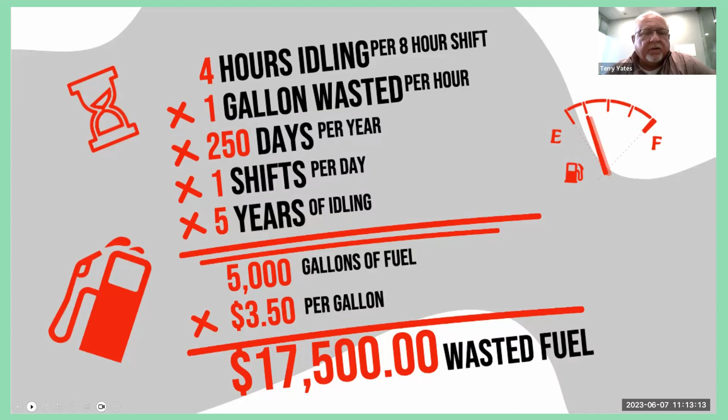So now let's look at the wear and tear on the engine. Now, this is the Ford number. Ford says when you're idling the engine, that is 33 miles of wear and tear on that motor that you're not seeing on that odometer.

So I've run into instances in the last few years where guys are doing their PMs by the odometer. They're not considering the engine wear and tear, but actually the PM is mainly engine filters and so forth like that. So you need to consider the hours of idling on that engine as far as miles and judge your PMs like that.

I have had customers too that have gone in for warranty at Ford, and Ford will plug into the black box and they'll say, well, your engine is out of hours on the warranty, because they're looking at hours, not the odometer on the engine.

So there's some tidbits to keep in mind, but that's a lot of wear and tear, which causes breakage. And we all know if we've been around vehicles at any part in our life, it is harder for a gas or a diesel engine to idle than it is to go down the road. Because when it's in idle, it builds up heat. It's not got the air flowing through, so it's not as easy for it.

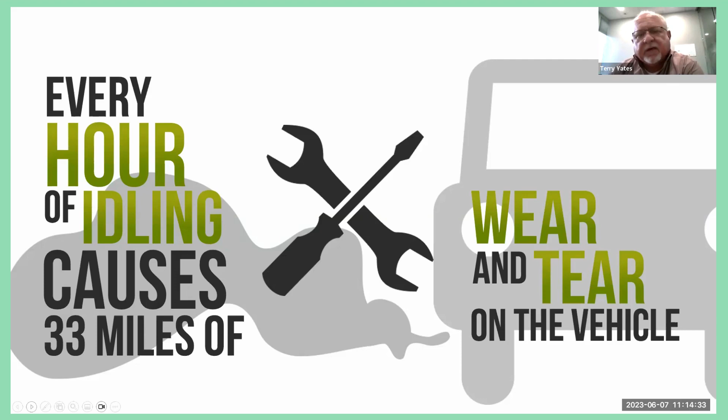It causes breakage. So same truck, 4 hours a day, 33 miles wear and tear. Now we see that same truck gets 165,000 miles of wear and tear on that engine that you're not seeing on that odometer in a 5-year period.

That's a lot of miles. I went and talked to a municipality out in Arizona one day, and that fleet manager didn't acknowledge this. About 15 minutes later, he came back and said, so you're telling me that truck out there that's got 200,000 miles on it, actually that engine's got 365,000. I said, based on an average of 4 hours idling a day? Yes, sir. That's a lot of miles on that motor.

I've run into a company not too long ago that's changing engines very often because they're wearing their motors out from idling. That company idles 6 to 8 hours a day, quite a bit of idle. So they're wearing engines out.

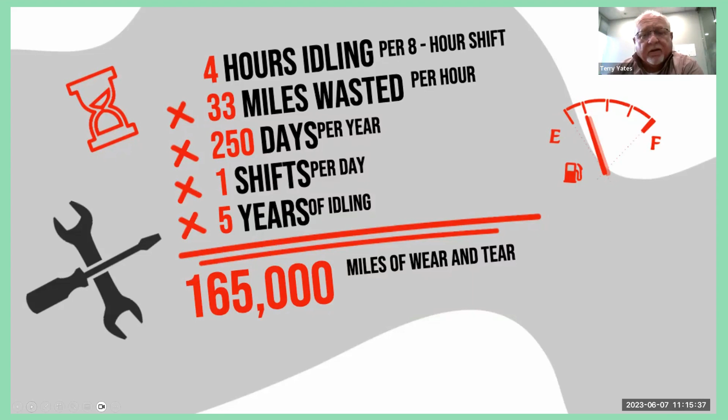But keep in mind, let's look at the green initiative, let's look at protecting the environment. That same vehicle, a gallon of fuel, 1 hour of idle equals 22.06 pounds of CO2 for diesel being put in the air. If it's gas, it's 18.95. So this same truck over a 5-year period, same fuel, we get 55 tons of CO2 emitted in the air. Now, I'm not trying to convince anybody of global warming, that has nothing to do with it. I'm talking about the air that we breathe, and we do need clean air to breathe.

55 tons of CO2 in a 5-year period. Let's think about that. What if you had 100 trucks in your fleet? How much you're messing up the air, and how much cleaner it would be if you cleaned up that idle. Just some thoughts to think about.

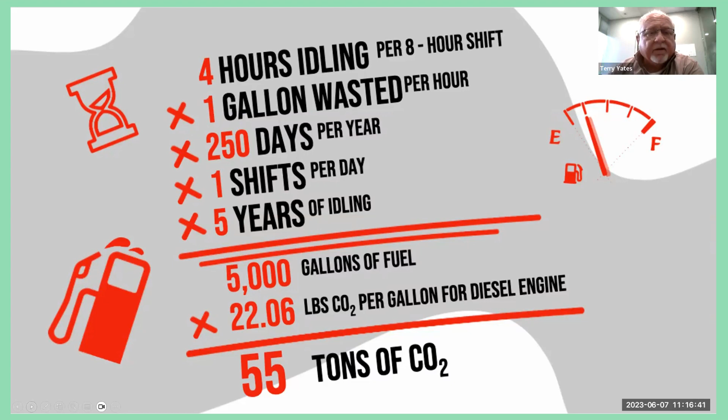So let's look at a summary of that. 1 truck, 4 hours of idling, 8-hour shift, 250 days a year, 5 years of idling. That's 165,000 miles of wear and tear, $17,500 worth of wasted fuel, and 55 tons of CO2 put in the air for 1 truck. And that's just for the 4 hours it's idling. We're not talking about the other 4 hours when it's driving or anything of the sort, just the idle.

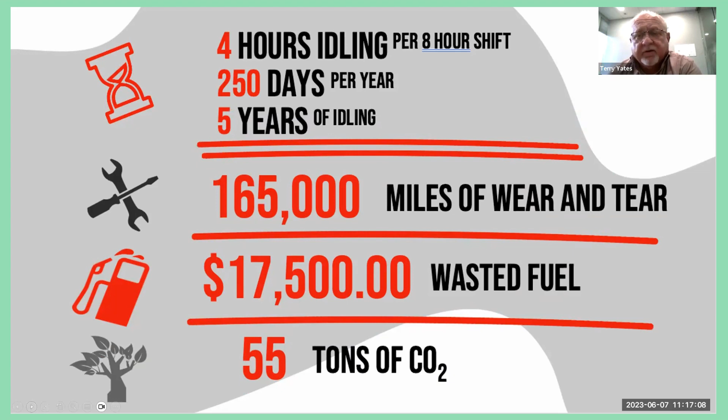We do have a solution. That sounds kind of corny. I've told them I'd like to change that because every time I say it, I feel like it's a little corny to say that. I think we got a solution, but it is what it is. That's what we're talking about.

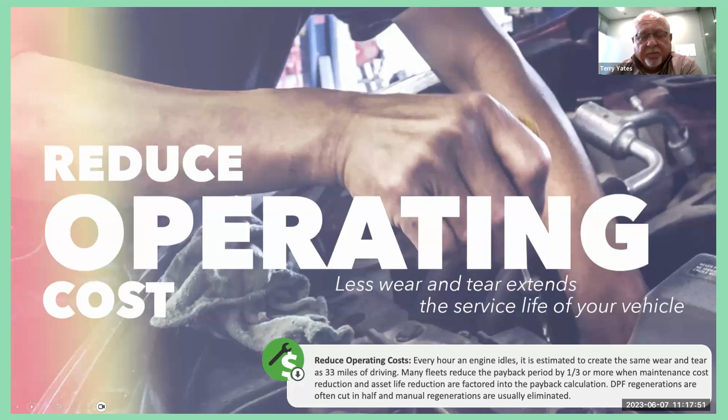We do have a solution, because if we can help you stop the idle or mitigate that idle, it's going to have an impact on the environment, on your gas bill, and on the wear and tear on your engines. It's going to help you several different ways. It's going to reduce fuel consumption if we can mitigate the idle. It will reduce operating costs because there'll be less breakage on the motor, and it'll reduce emissions, so we're going to breathe easier because we're not going to be putting CO2 in the air.

Now let's talk about why we idle. Most of the time, the reason we idle is for creature comforts. As I mentioned earlier in my presentation, in Florida you've got humidity, you've got heat. So why do you idle? It's because you want that AC running, because you're hot. And when you're in your office making a phone call, working your laptop, or taking a break, you don't want to sweat, you want to cool off.

Improved operator safety and comfort, that's what we can do, because our system can turn the engine off and you still get factory heat, factory air from the dash with the factory controls, and nothing changes for that operator. The only thing that's changing is we're turning the engine off.

And you're saying, wow, how can you do that? I said the same thing. When I first thought about this, I had ZeroRPM, I said, you can't do that, that engine's got to be running to provide AC. Let's talk about that a little bit. So when the operator pulls up and puts his vehicle in park, we give him a 5-second countdown, and then we automatically turn the engine off.

Our computer does this. He does not flip a switch and do this. We will run his heat, his AC, his power, and you all see that screen. We're going to run everything that he has to do with his job all day long without running the engine.

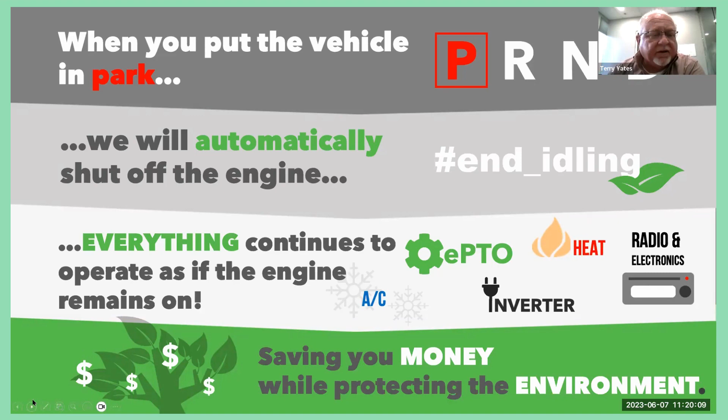We take a charge from the factory alternator, so when our battery gets low enough, it will start the engine to take a charge from the engine. But there's more to it than that. Let's kind of get into the nuts and bolts of this thing.

How does it work? When the engine's on, you've got a belt-driven alternator that provides the power. You've got a belt-driven coolant pump that circulates the coolant in the engine block that provides the heat when you need heat. And then you have a belt-driven AC compressor that turns as the engine's turning, that provides the cooling for the AC.

So when the engine is off, you're running on our lithium iron battery, which is the safest form of lithium made - a very, very safe form. You have a DC electric coolant pump, and what that means is it's mounted underneath the hood, and it circulates the coolant in the engine when the engine's off, if you've got it on heat.

You guys probably don't deal with that much in Florida, but if you're in the northern countries and you want heat, that's an important factor, because you want the engine warm enough to provide heat through the factory dash. So here's what happens when that engine cools off enough that it can't provide heat: we're monitoring that, and we'll start the engine, warm it back up to operating temperature, and then turn it back off. So we're getting rid of the unnecessary idle.

So now let's talk about the important part to Florida: the DC electric AC compressor. We have a patented one-way valve that we tie into the Freon lines right outside the factory compressor. So when that engine turns off, that valve opens, and our DC electric AC compressor starts running the whole factory system, the same way the factory compressor does, except it's not running - it's our compressor that's running. Same Freon, same everything, same complete system.

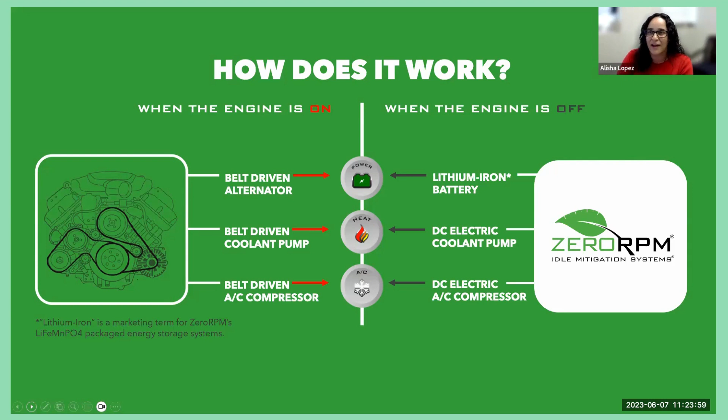Very important question. What I thought you were asking at first was, once our system is engaged, it will cycle 24/7 till you turn it off. But if you were saying they were going to work on the truck, anytime the hood is open on the truck, it disengages us. We will not start that engine at all. Important safety factor, because a lot of people are concerned about that. That's what I thought you meant, but let's answer your real question now.

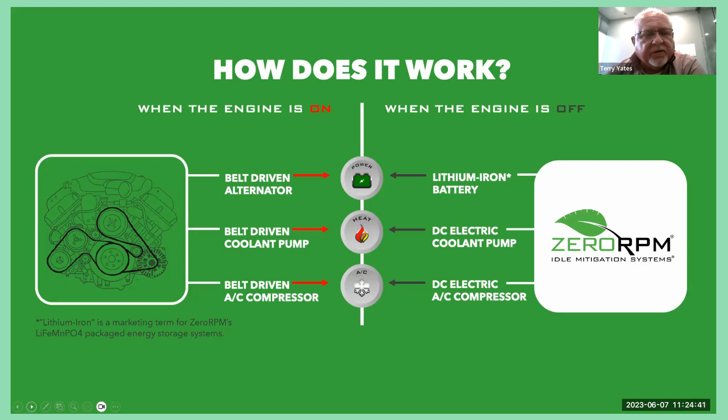So let's talk about the features, and we'll get to answering your question. We have engine-off AC through the factory vents, engine-off heat through the factory vents, lithium battery power to everything, and automatic recharging - meaning we can charge from the 12-volt alternator or a solar panel. We have solar panels that perfectly fit the roof of an F-series truck, and we have them for transits and everything else, so you can use a solar panel to help charge that lithium, which is also a big green initiative. You can also use shore power, so there are several ways to recharge that lithium battery.

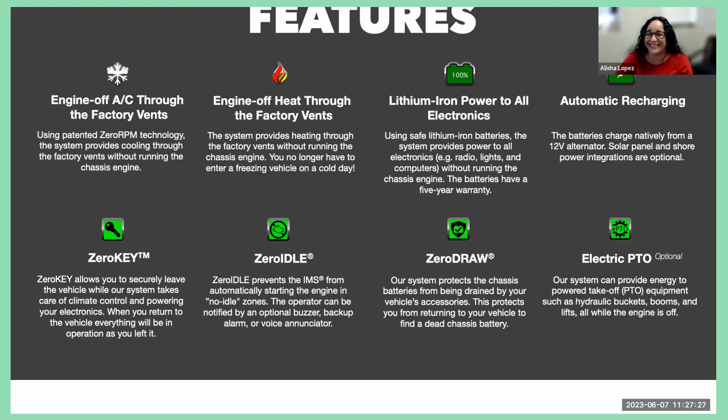So yes, when you get out of the truck and leave - I did an inspector's truck out in California, and that was exactly what he did. He was idling his truck, so he would leave the key in it, leave it idling, and go do his inspections. A couple of problems with that: somebody might want to borrow your truck, and another thing is it's just sitting there idling, burning fuel.

So you push that button, zero key, and we turn the engine off. He can lock his truck, walk away so nobody steals it, and everything stays the same. He can come back 3 hours later, 6 hours later, 8 hours - I've done that overnight. I always tell people this, and it's a fact: I was in Southern California, and I had it in zero key, and I didn't even think about turning it off. The hotel wakes me up in the middle of the night, and they ask, 'Mr. Yates, do you have a gray Ford F-250 out there in the parking lot?'

Yes, I do. And they said, well, you left it running. I said, don't worry about it, it'll turn itself off in a minute. Just leave it alone. It won't turn off until you turn the key.

So there's another button called zero idle. In our country, it's not as enforced now as it will be, but there are zones where you cannot idle an engine, like hospitals or government offices. When you're parked up close, they don't want you idling.

So if you're on zero idle, you can hit this button and our system will not start to recharge itself. Instead it will send you an email saying, hey, you need to move me so I can recharge, or I'm shutting down. But you got a choice, I'm not starting the engine. So it keeps you from getting a ticket in a zero idle zone.

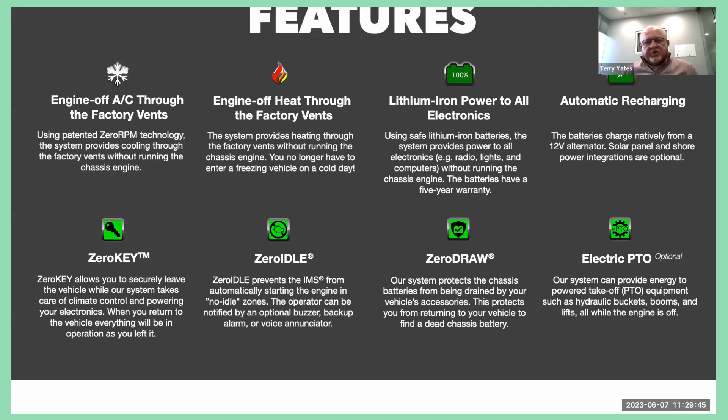Now what we do is actually monitor. So when we start the engine to recharge our lithium battery, the first thing we're going to do is check the crank battery. If the crank battery needs some charge, we let the alternator charge it first. Then as soon as the crank battery is fully charged, we take all the charge the alternator is putting out straight back to the lithium battery.

So all of this is done automatically. Your operator does not have to even know that this is happening. It's just going to happen.

We can run an electric PTO. I cannot do a bucket truck or digger derrick. We have a previous non-compete contract where we designed those systems for Altec. So Altec uses our system on their bucket trucks. It's called a JEMS unit.

You may have some of those in your fleet. The JEMS unit is our unit, an earlier model. We have evolved quite a bit since then, because we do a whole lot more different applications than bucket trucks or digger derricks. We can put ZeroRPM on any application that's out there.

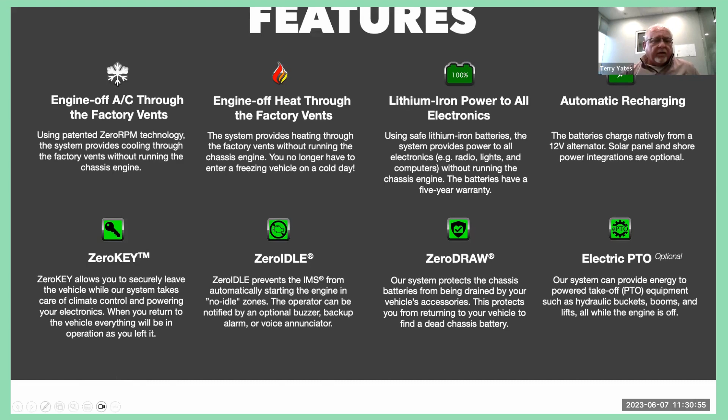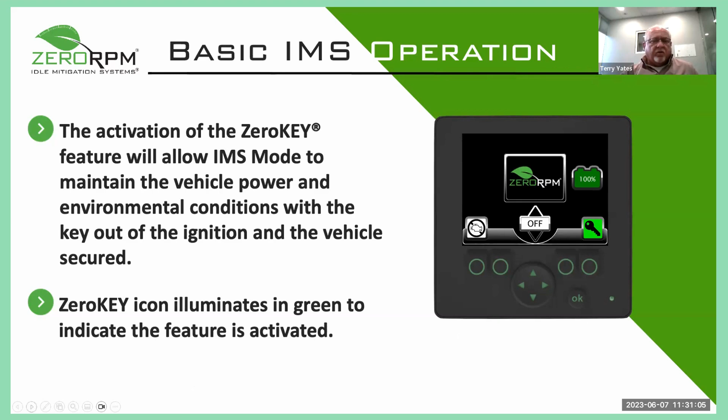When you activate the key, you can see it turns green. That means zero key is on, meaning you can take the key out, lock the truck up, and walk away. Our system is fully integrated.

Here's one difference between us and some of our competitors: everything we have is designed, engineered, and built in Cullman, Alabama. Now, yes, we do buy certain parts from different places, but it all comes in there and is all designed, engineered, and put together there and integrated to make sure it works together.

I have a question for you, Terry. So for instance, with Buy America, I don't know if a lot of people on the call know, but this would be perfect for those kinds of vehicles. Because I know with certain funding through DERA, through the Environmental Protection Agency, there are certain parts and qualifications that fleets need. And they're having a really big push on everything being purchased pretty much in America.

Yes, so that's why I wanted to make sure all the parts, everything, is from Alabama. Well, yes and no. I'm sure certain portions are. It's like on a lithium battery cell, I don't care who the manufacturer is, they all come across the water right now. Yes, they do, you're absolutely right.

That may change in the near future. There's a lot of things happening, as you know, with GM and Ford and others putting plants in and stuff.

That may change in the future, but as of right now, it is not. Our cells come across the water for our batteries, but we assemble, test, and put them together in Cullman, Alabama. Also our Intellimetrics comes from Germany, but it's built and put together in Cullman, Alabama. Since we bought ZeroRPM, they build our large batteries for Xantrex, all of our lithium batteries, so there's a lot going on there in Cullman, Alabama.

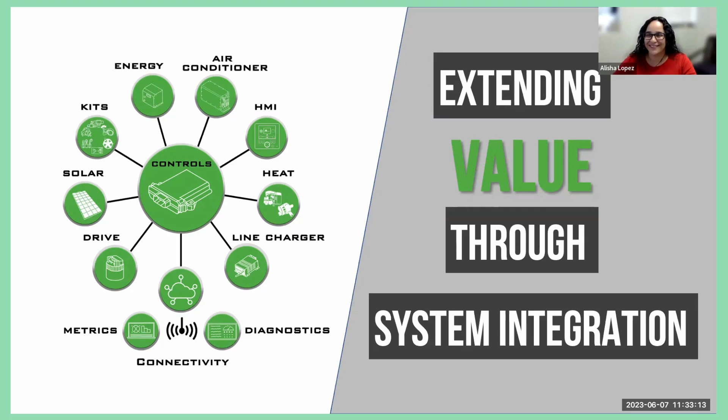What I was going to say about the system integration is that by us buying all the products, engineering everything together, and building and putting it together in Cullman, Alabama, that means everything's working together. That means if you put this in your trucks, you've got one guy to call if you have any kind of issue. I have competitors out there that will buy five or six different boxes and plug them together and say it's going to do the same thing as mine. Well, here's the problem with that: when one of those parts doesn't work anymore, you call them and they say, well, Joe built this, so let me give you Joe's number. We don't do that. Everything is ZeroRPM, 100%. We answer for it, we service it, we build it completely.

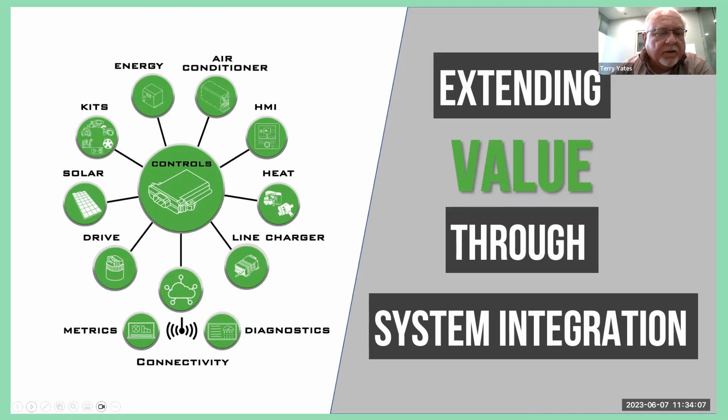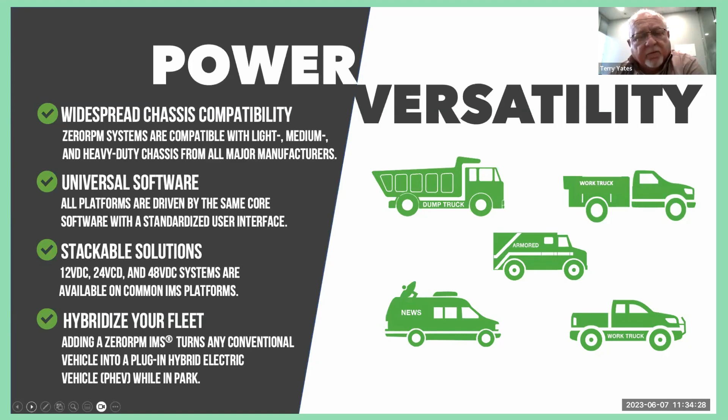Versatility is we can put this on in there. I've already explained that, we can put this on just about anything you've got in your fleet. I will say this: the criteria of where it's going to help is I need a vehicle that's at least idling four hours a day to make it a viable solution, monetarily.

I have a question for you, Terry. So as far as passenger vehicles, would that work? I guess the one that comes to mind is law enforcement, which might be idling for longer periods of time as opposed to maybe some other fleets. But would that system also work in those vehicles for law enforcement?

Yes, it will. Here's the problem we usually have with law enforcement, and I don't handle the emergency vehicle applications, but I do know this: they put so much stuff in those vehicles. Sometimes it's a space issue, and sometimes we have to add an extra battery pack just to run all the electronics they have in there. But it can be done, it's just a matter of if there's enough room for us to place it in. So let's say you've got a Tahoe, that would probably be doable. But if it was a car, the regular little police cruisers, yeah, that might be a problem.

I'm curious about electric vehicles, because we do have a police force that has electric vehicles now too. I know there's nothing coming out the tailpipe, so I guess there is no idling for that. Well, there is no idling, but I will mention this, Alicia, I'm glad you brought that up. I have a solution for that too.